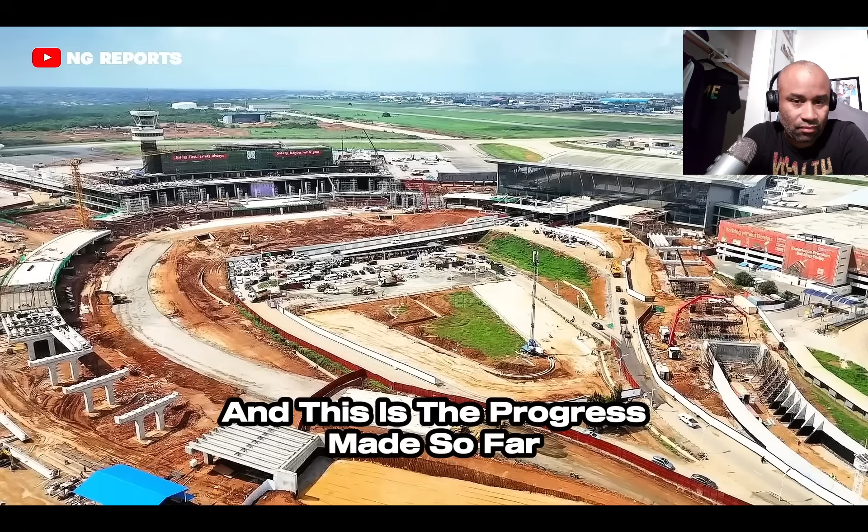Let's get into this. Murtala Muhammed International Airport, and this is the progress made so far. Just a few months ago, work began with the construction of a modern temporary

Here's a question I got. Since it's being built, how much are you guys getting? How much are people getting paid to work at this construction site? Like, is it good money? Is it consistent? Is it a union? Like, what's the work like at this construction site?

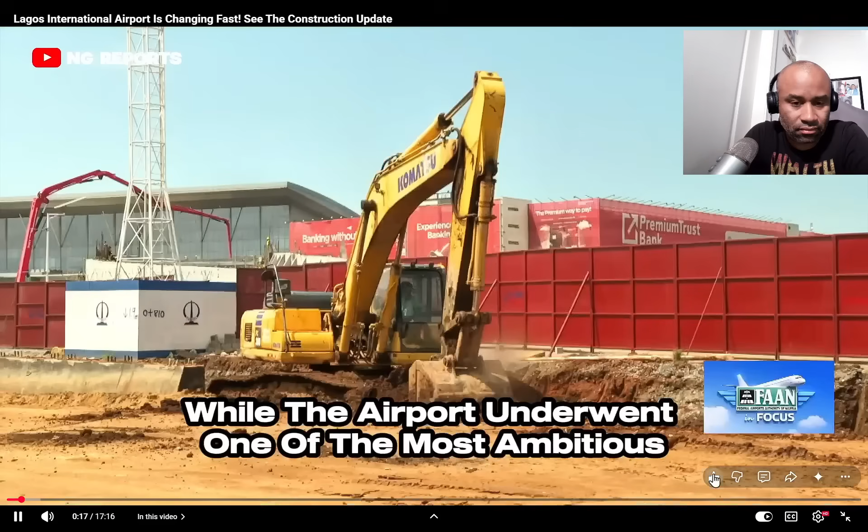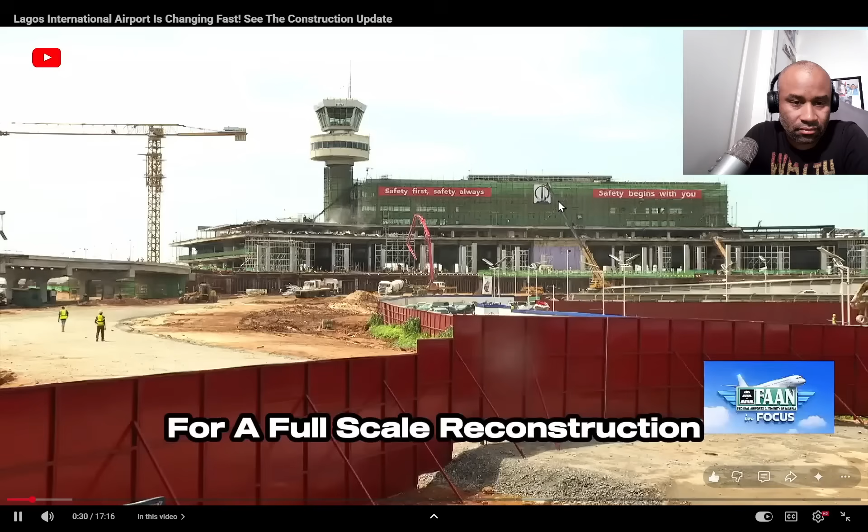international terminal to ensure passengers could continue flying while the airport underwent one of the most ambitious redevelopment projects in Nigeria's aviation history. Since then, Terminal 1 has been completely shut down and stripped back to its structural frame for a full-scale reconstruction. Now, I did a reaction a while ago where they had a temporary terminal, and that temporary terminal looked almost better than a lot of airports' regular terminals.

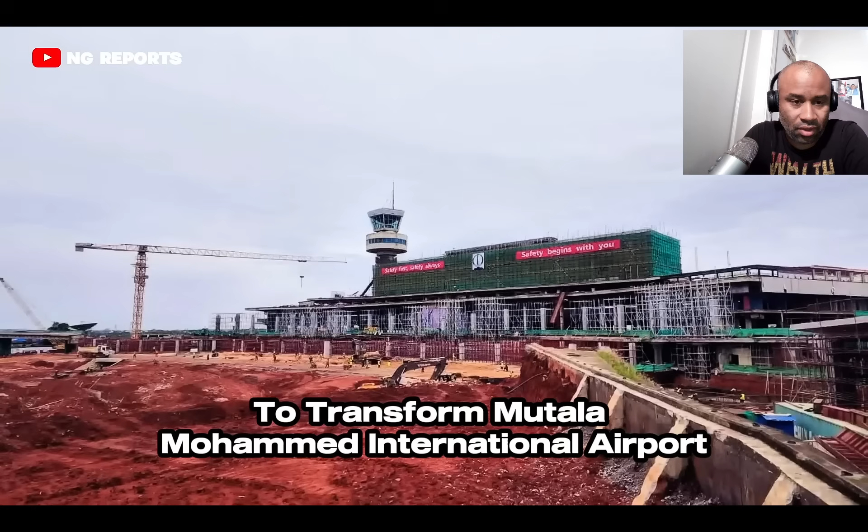Another major phase has officially commenced, the redesign and expansion of Terminal 2. These developments are not isolated projects. They form part of a comprehensive master plan to transform Murtala Muhammed International Airport into a modern, world-class aviation hub capable of serving millions of passengers more efficiently while enhancing safety, comfort, and operational capacity.

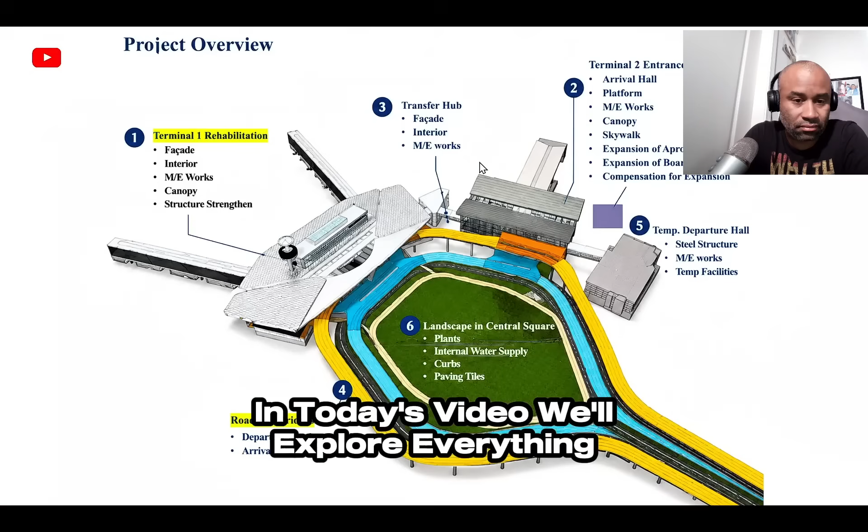In today's video, we'll explore everything you need to know about the project, from the redesign and expansion of Terminal 2 to the construction of the new airport road network, the latest update on Terminal 1, the future of the temporary terminal, and a complete overview of what passengers can expect over the coming months. I hope this thing is done when I get there, because I want to see the finished product.

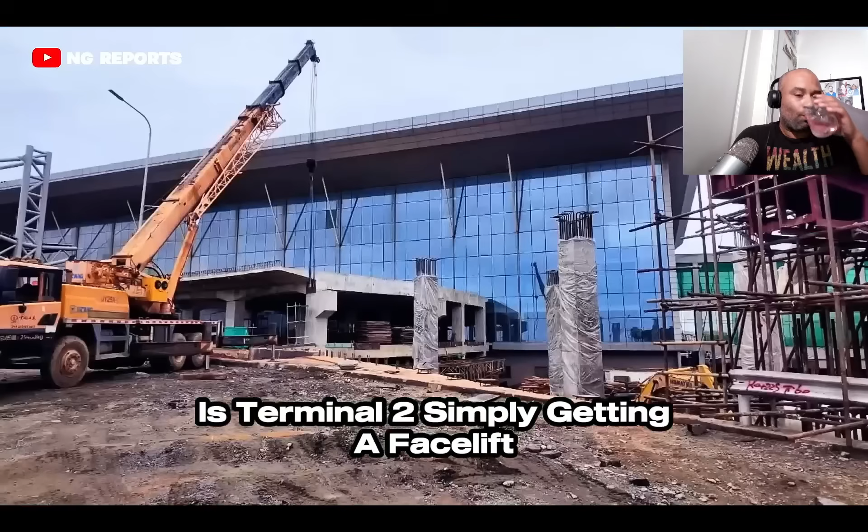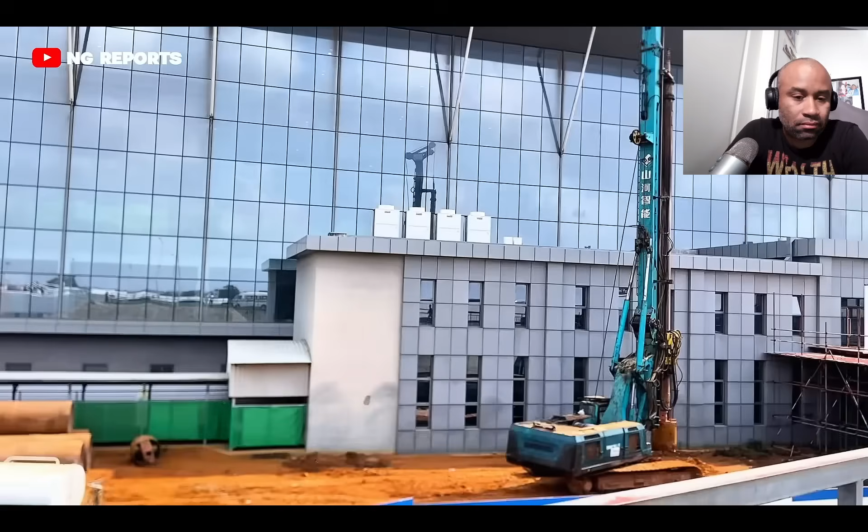Terminal 2 renovation progress. One of the questions I receive most often is, is Terminal 2 simply getting a facelift, or is it being rebuilt? The answer is that this is much more than a cosmetic upgrade. According to the Minister of Aviation and Aerospace Development, Mr. Festus Keyamo, SAN, Terminal 2 is undergoing a comprehensive redesign and expansion that will significantly improve passenger experience and airport operations.

If you walk into Terminal 2 now, which is even the new one, we are still touching the new one, spending so much money on it. If you walk into the new terminal now, what do you notice? You have to now take your bags up to departure. So when you arrive, it's not going straight to departure. And that's a design error all over the world.

There's no airport in the whole world where there's only one door. What if there's a stampede? How can you have one entrance into a big international airport? If you go to all international airports, you see more than 7 entrances. Even the small one here in Sacramento has multiple entrances. In fact, every airport has multiple entrances, and we're a small airport in Sacramento.

Different doors, different entrances. A, B, C, D, and even the old one. If you remember the old one, Terminal 1, picture it. You have different doors. You have the Qatar, exactly. The BA. You have the picture in your head. Picture this new one, only one door.

How? And then when you drive in, you have to climb up with your bags, haul them either through the lift or escalator. And God will forgive you if it's not working. You have to then physically climb the stairs with your bags. So now, with that slope of an escalator, oh, hell no. If that escalator broke down and you gotta carry that up that slope, that's brutal. And that might be fine if you have one luggage.

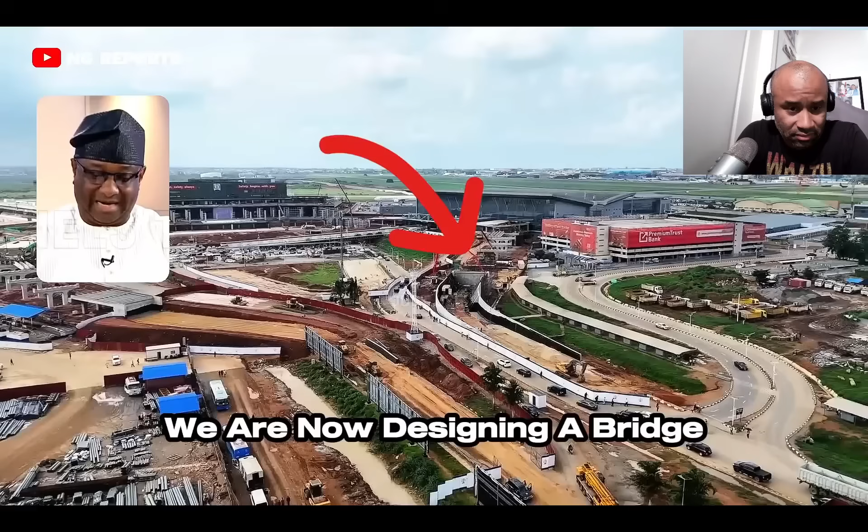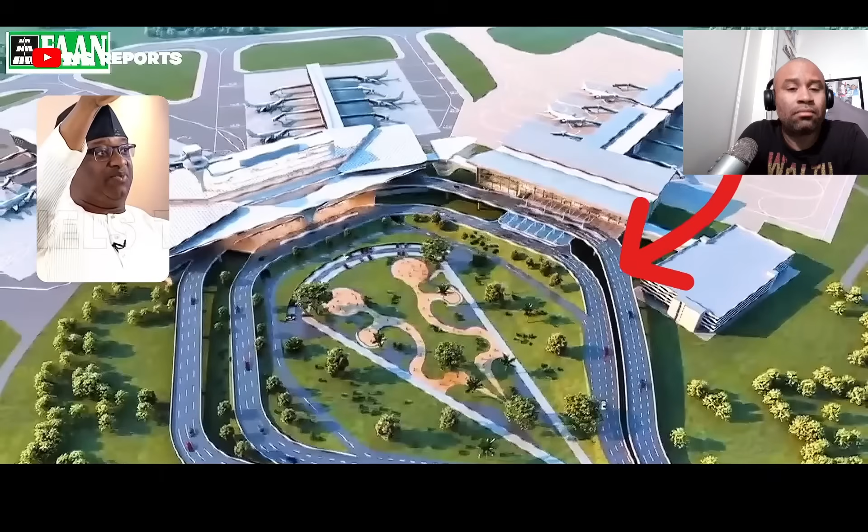We are now designing a bridge. Immediately after the army checkpoint, you are going to veer off the road and then a bridge will begin to climb that takes you straight to the second floor of that new terminal. Yeah. So that takes you straight to departure. We are putting a bridge there. It takes you to departure.

Do you understand me? And so you come down there. There'll be a drop-off. And so now you usually drop off at one car park, and then you have to haul your bags up. So now that bridge will just pass by the door, by that glass frame of that second floor. Yeah. And so you now stop there and then walk in straight into departure.

So describe to us. That bridge goes round. That bridge goes round. It's a circular bridge. It goes round again all the way.

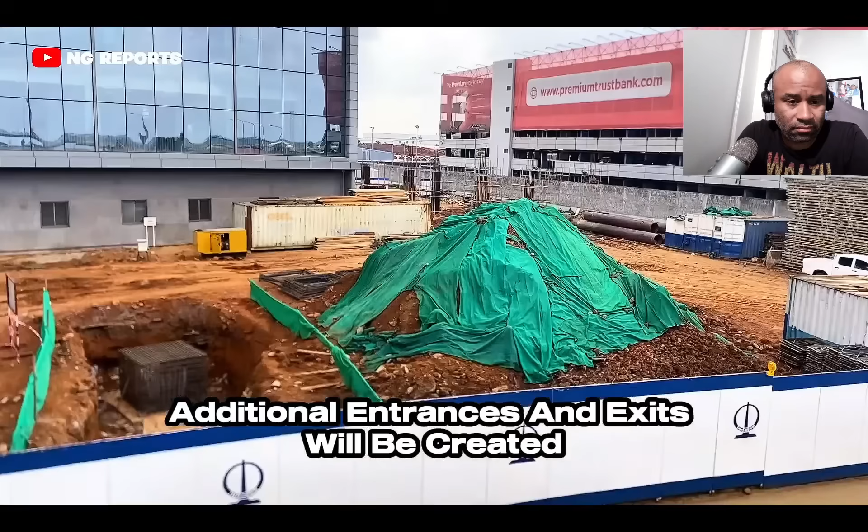One of the most important improvements is the expansion of the terminal building itself. Currently, the international terminal relies heavily on a single main entrance and exit, a layout that has long been considered inadequate for one of West Africa's busiest international airports. As part of the redesign, additional entrances and exits will be created to improve passenger movement, reduce congestion, and provide easier access during peak travel periods.

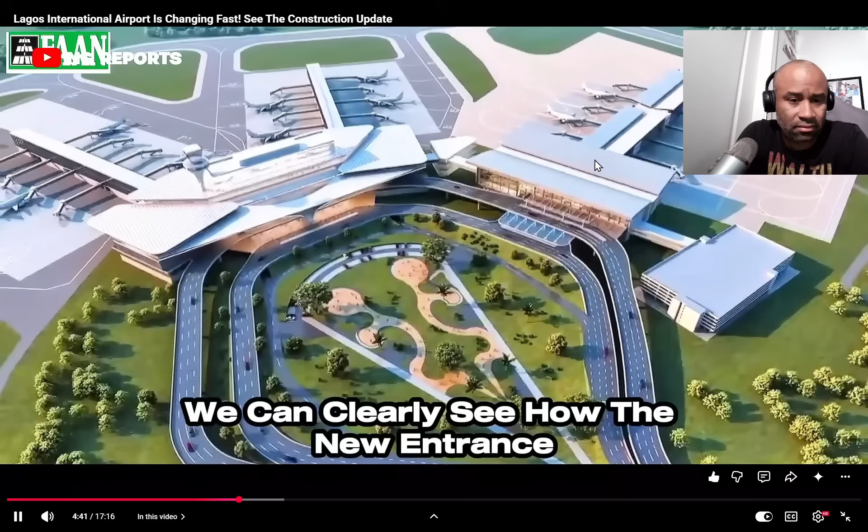Looking at the proposed architectural model, we can clearly see how the new entrance roads will function. Unlike the current layout, where nearly all departing passengers enter through a single access point before taking escalators or elevators to the departure hall, the redesigned system introduces a much more direct approach. Passengers will have easier access to the departures level, creating a smoother and more efficient airport experience.

We're going to be doing a lot of work to T2. I know a number of people have asked, look, what exactly is wrong with Terminal 2? When Terminal 2 was initially built, there was a litigation with the Federal Airports Authority of Nigeria and a concessionaire around the existing location. As such, the dimensions and the sizing of where T2 was built had to be reduced to accommodate the area that was available.

We thank the federal government because we've now taken a look at the overall master plan. We've seen that there are some hangars which are actually obstructing the area. We're able to relocate those hangars. That way we can actually extend the finger in T2. Terminal 2 will now be able to accommodate an additional 15,000 square meters. Nice. And let me tell you what that does. It's not just about increase in space.

It's really the fact that in today's environment, we're actually able to only process one wide body aircraft at a time. So for those of you who fly the likes of British Airways, Lufthansa, and KLM, you realize that you're landing in Terminal 2 today, but we're still moving you over, or you're checking in from Terminal 2, but we're still asking you to go through the finger in T1.

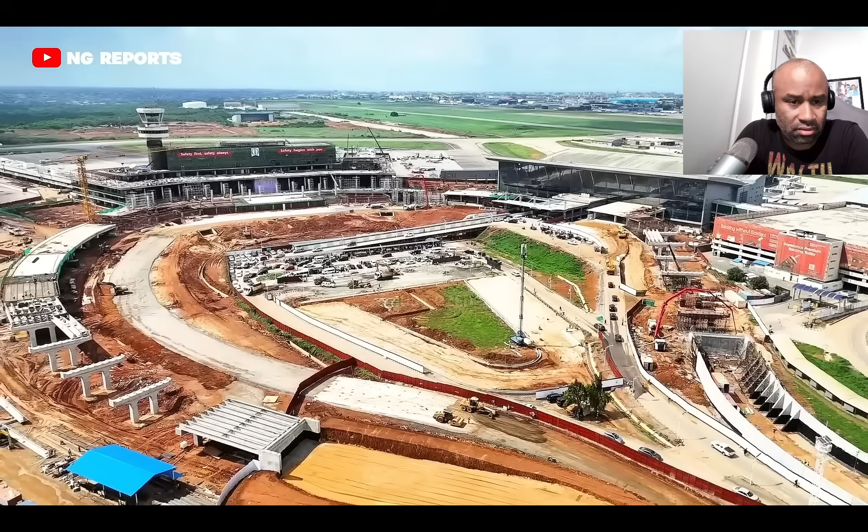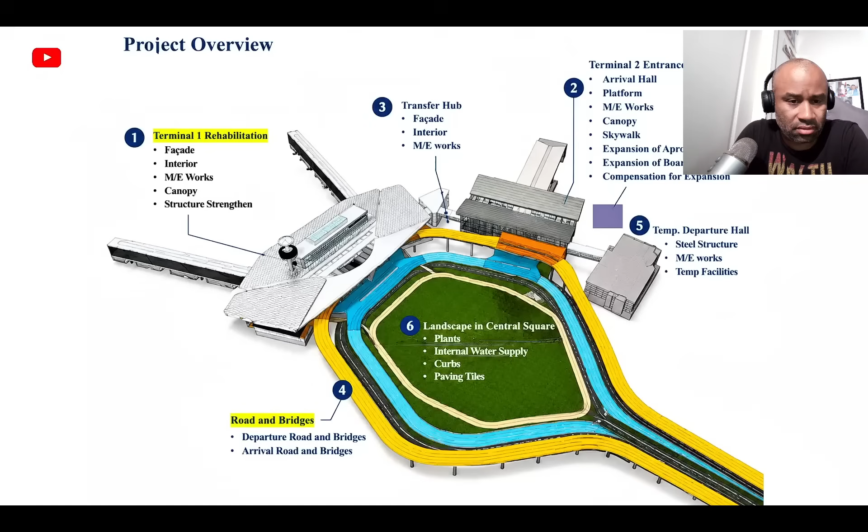Complete airport project overview. The redevelopment of Murtala Muhammed International Airport goes far beyond upgrading two terminals. It is a complete transformation of the airport complex. Let's look at the 6 major components of the project. Terminal 1 Rehabilitation. Terminal 1 is undergoing a complete reconstruction.

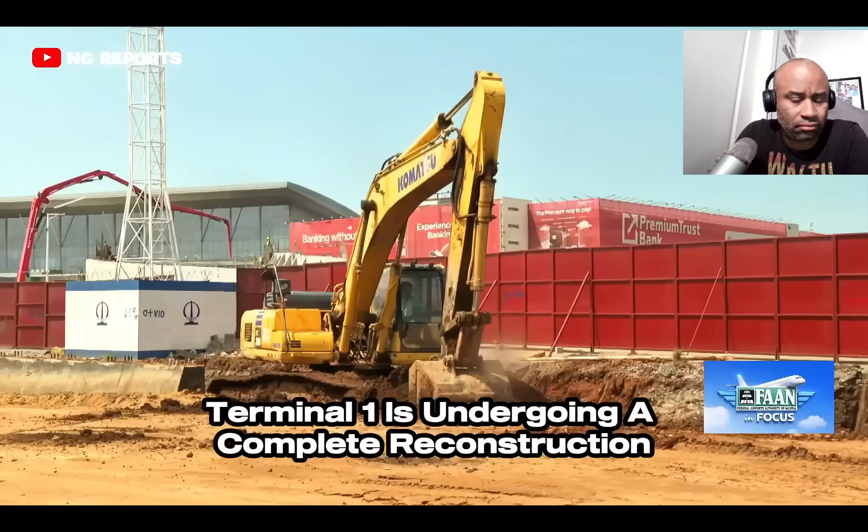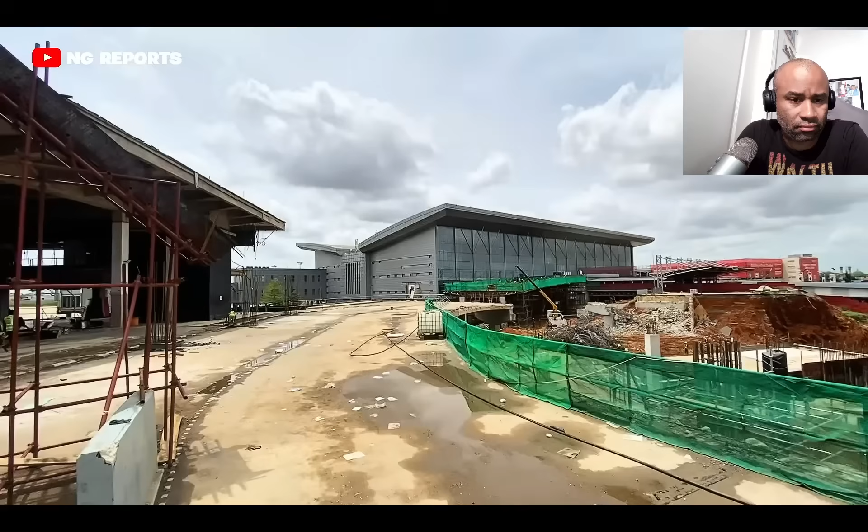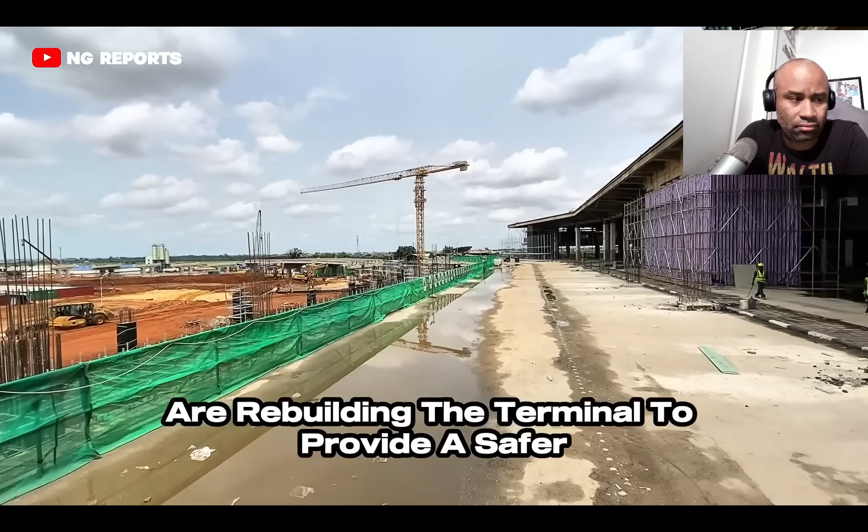The rehabilitation includes a brand new exterior facade, a complete interior renovation, replacement of mechanical and electrical systems, new entrance canopies, and structural strengthening to modern engineering standards. Rather than carrying out minor repairs, engineers are rebuilding the terminal to provide a safer, more efficient, and modern passenger experience. Okay.

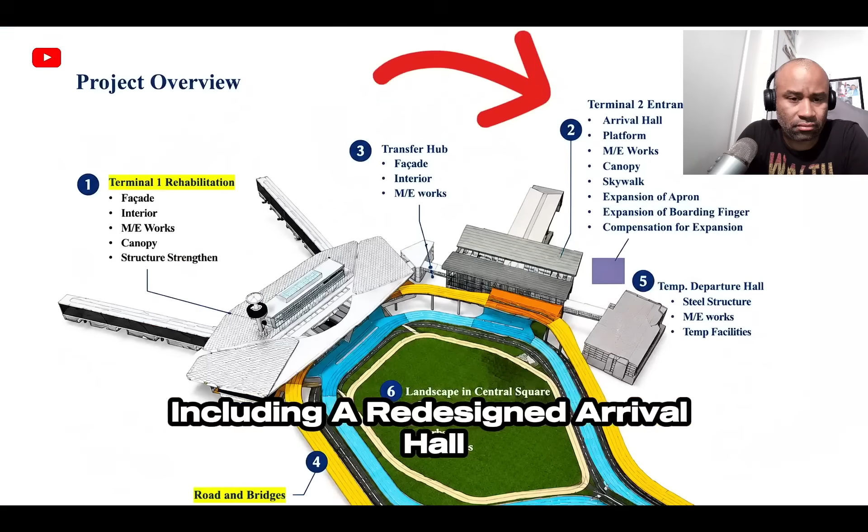Terminal 2 Expansion. Terminal 2 will receive major upgrades including a redesigned arrival hall, improved passenger platforms, new mechanical and electrical infrastructure, a modern entrance canopy, construction of a skywalk, expansion of the aircraft apron, expansion of boarding bridge areas, and property acquisition where necessary to support future growth. These improvements will increase passenger capacity while allowing the airport to handle larger international aircraft more efficiently.

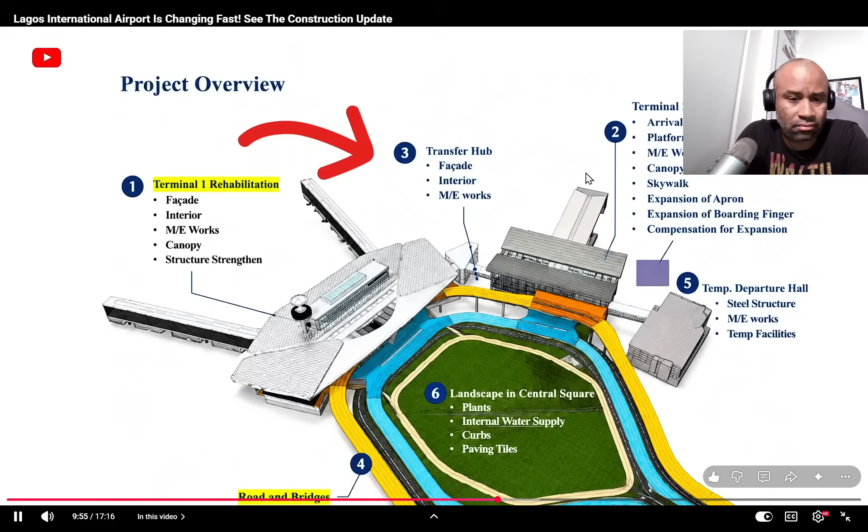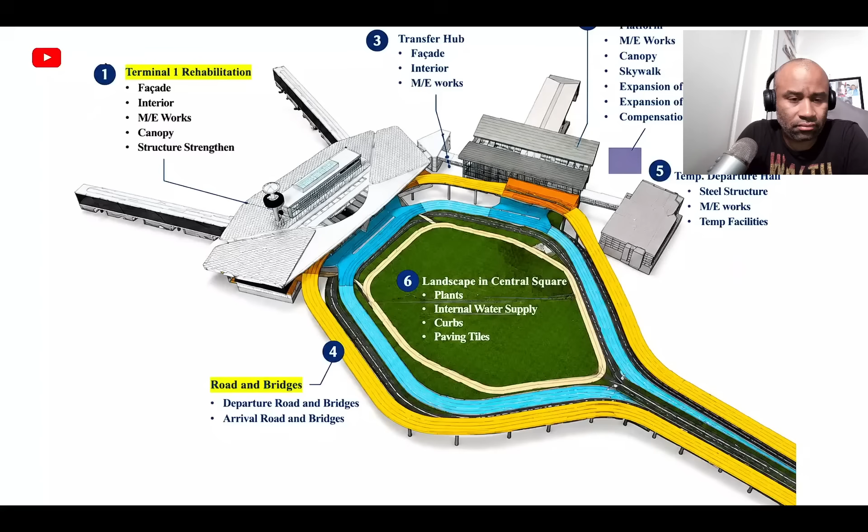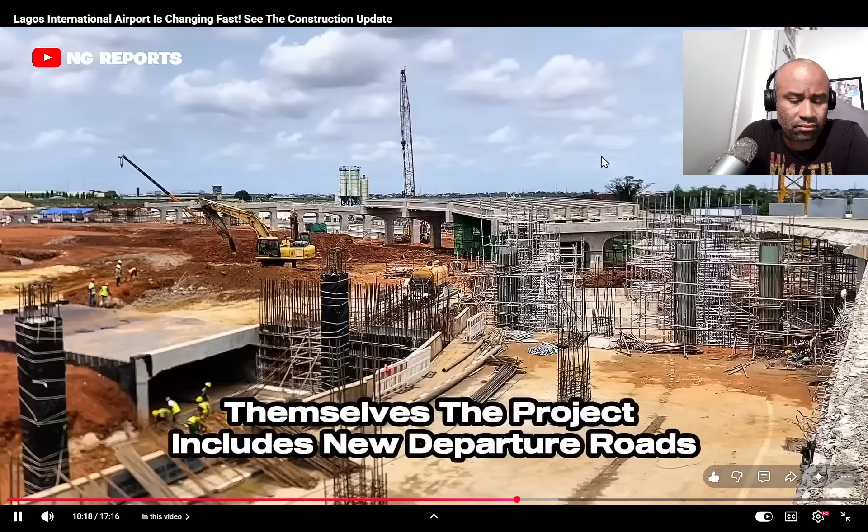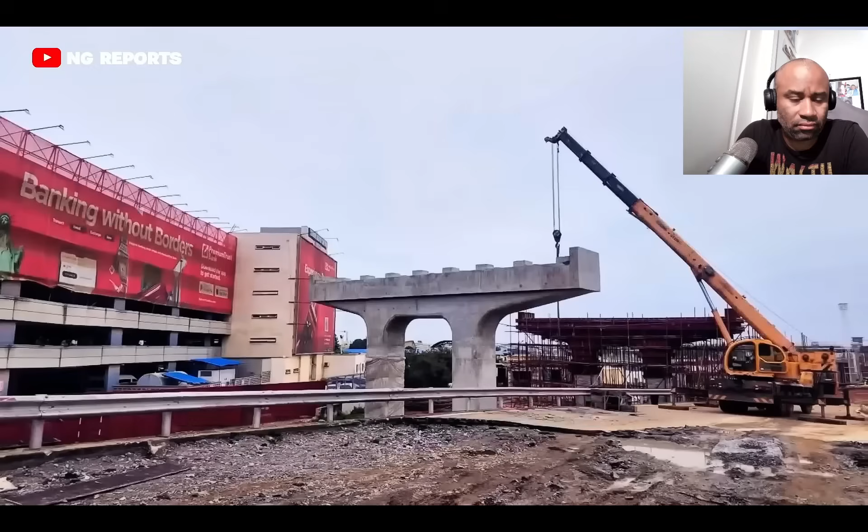A new transfer hub. The hub will feature a modern architectural design, upgraded passenger spaces, and advanced mechanical and electrical systems. Roads and bridges. Very important. Surface transportation is receiving just as much attention as the terminals themselves. The project includes new departure roads, new arrival roads, additional bridges, and improved internal road connections. These upgrades are designed to reduce congestion while improving traffic flow throughout the airport.

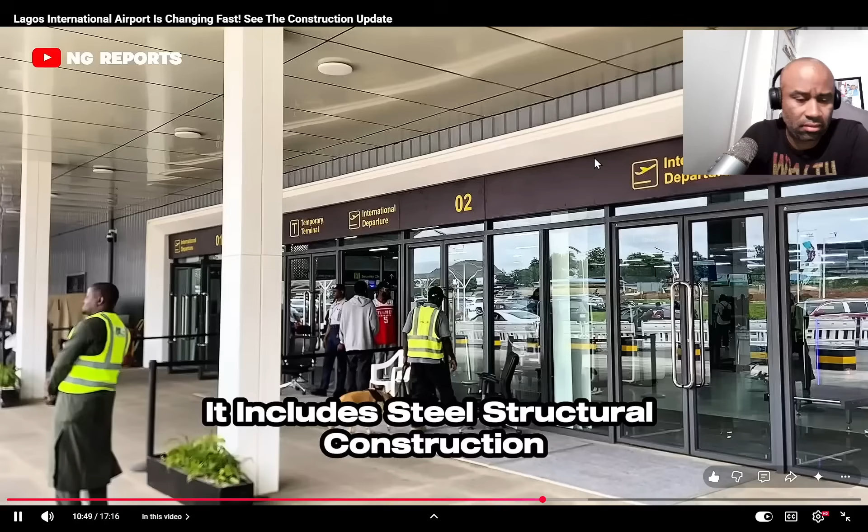Temporary departure terminal. Before Terminal 1 closed, the airport constructed a modern temporary departure terminal. Although designed as a temporary facility, it includes steel structures. See, this is kind of the interior I'm used to right here. But obviously more doors, so this is kind of what I'm used to. And I wonder why, they explained it already in the video, but yeah, it's strange that the original one wasn't like this before.

Structural construction, modern mechanical and electrical systems, passenger waiting areas, check-in facilities, security screening, and boarding gates. And will there be a business lounge? Gotta have a business lounge. This temporary terminal has allowed international operations to continue without major disruption while reconstruction work progresses.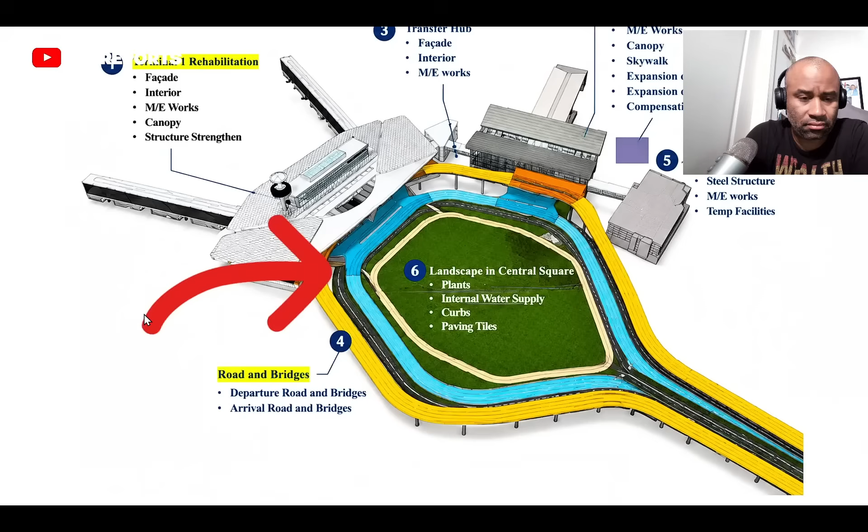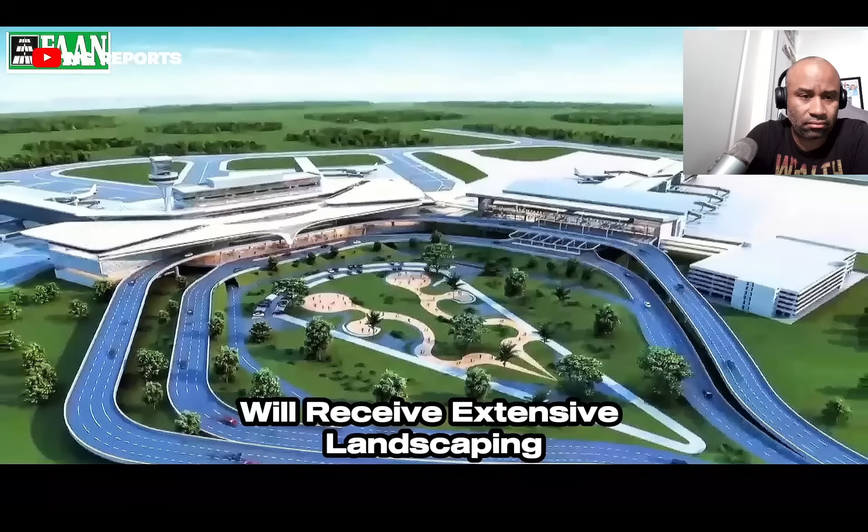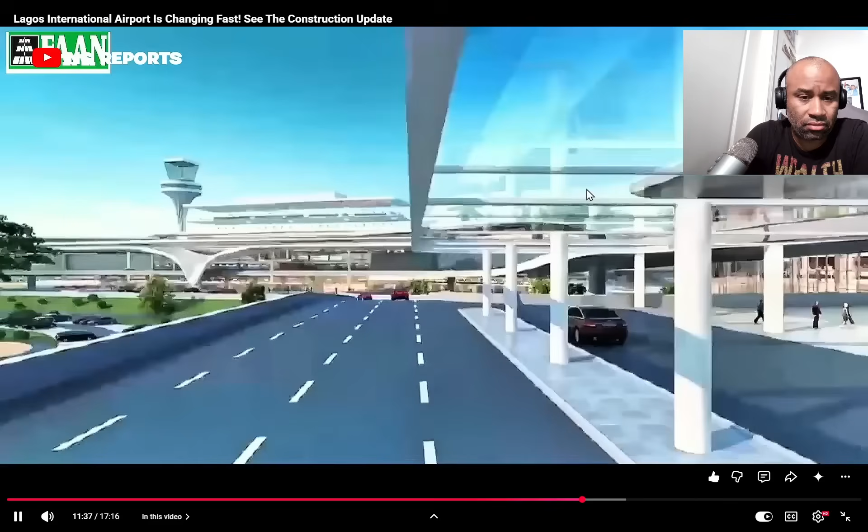Central Square landscaping. The final component focuses on creating a welcoming first impression. The central square in front of the airport will receive extensive landscaping, including trees and ornamental plants, internal water supply systems, new curbs, modern paving, and improved pedestrian walkways. And also, where are the pickups for like taxi, Uber, and stuff like that? These improvements will enhance both the beauty and functionality of Nigeria's busiest international airport.

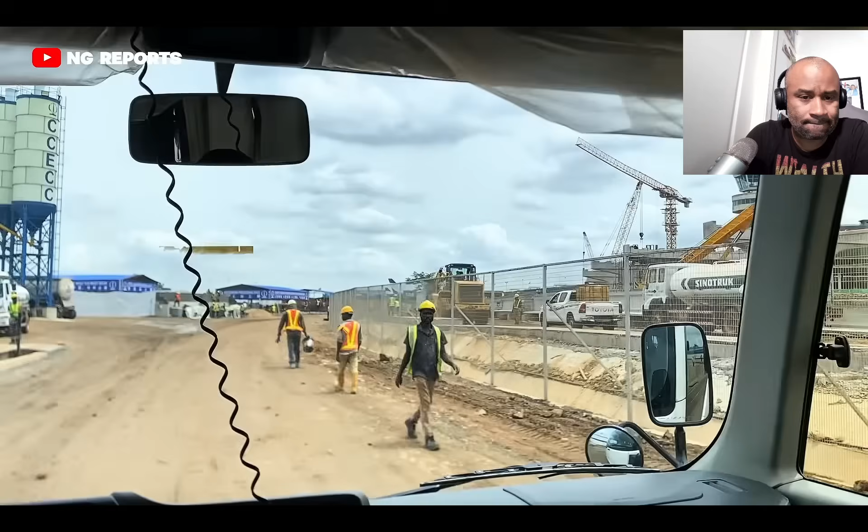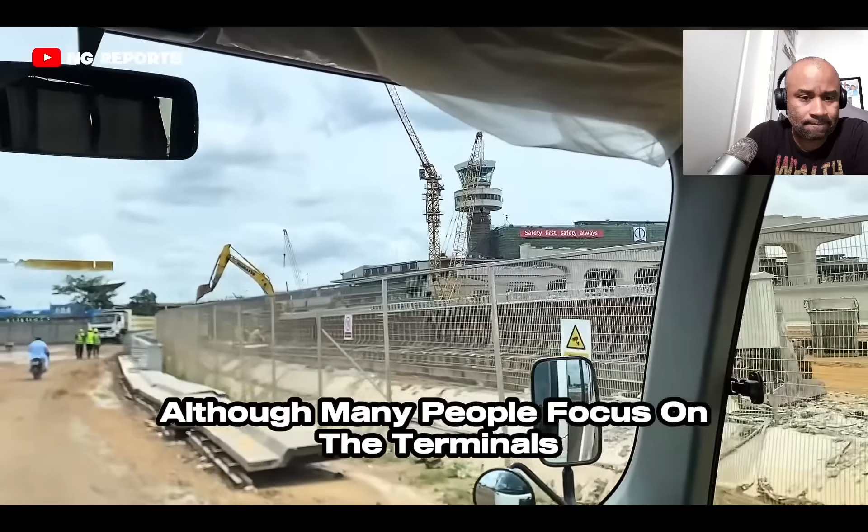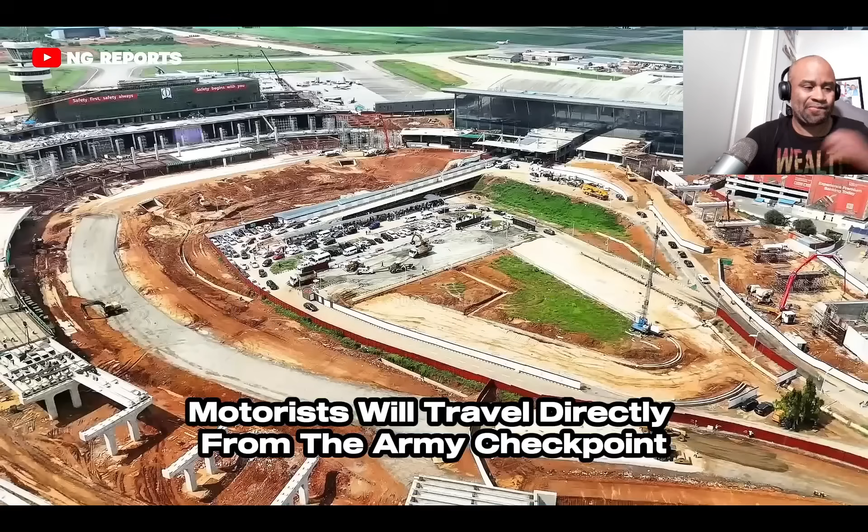New airport road network progress. One of the most impressive aspects of the redevelopment is the construction of an entirely new airport road network. Although many people focus on the terminals, the road system will fundamentally change how passengers move through the airport. Once completed, motorists will travel directly from the Army checkpoint into the airport, with easier access to both Terminal 1 and Terminal 2. Nice. Passengers will also be able to reach either the upper departure level or the lower arrival

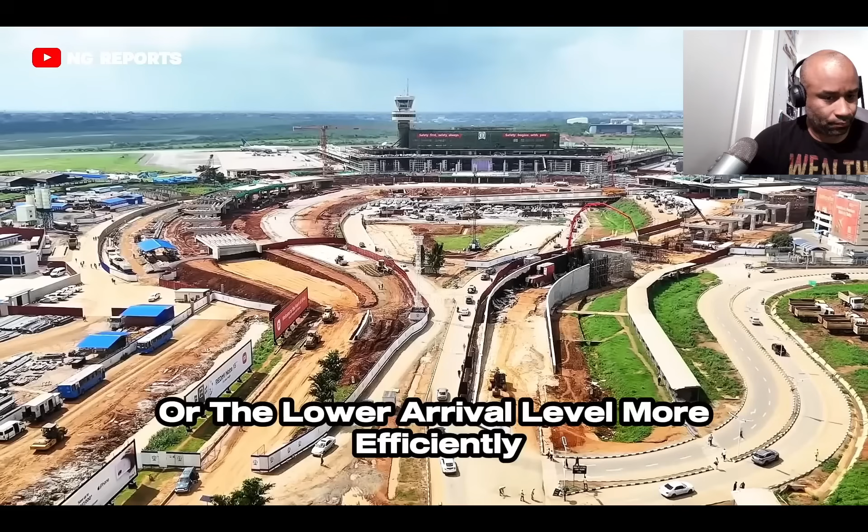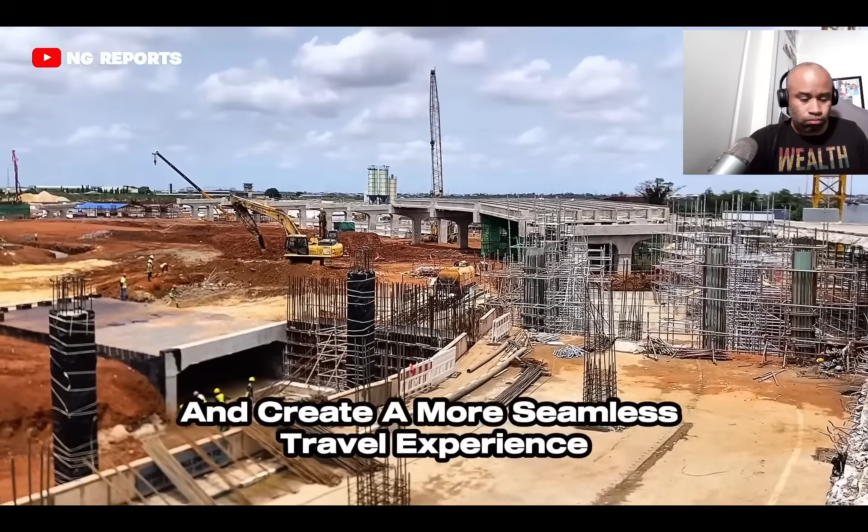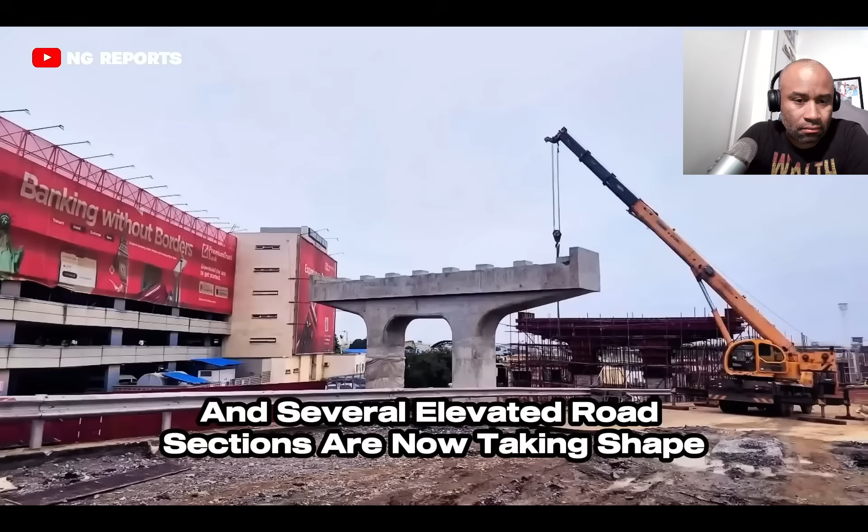level more efficiently. The redesigned layout is expected to improve traffic circulation, reduce congestion, and create a more seamless travel experience. Nice. Construction is progressing rapidly. Across the site, reinforced concrete pillars have already been completed, and several elevated road sections are now taking shape. With each passing week, the overall design becomes more visible, offering a glimpse of what the finished airport will look

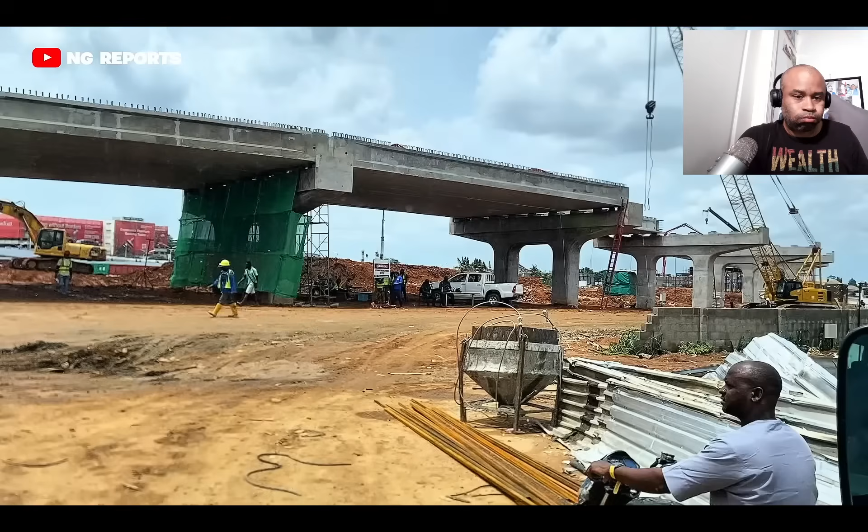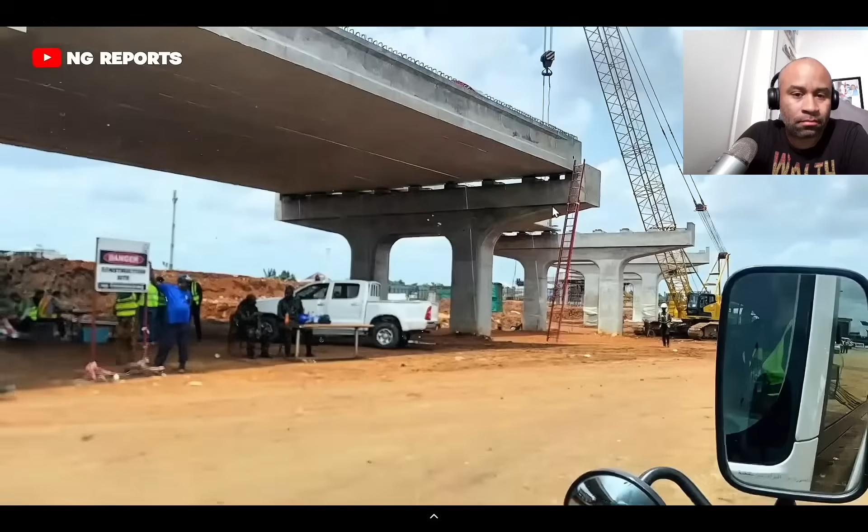like. Beyond improving traffic flow, the new roads will also enhance the airport's appearance, creating a more modern gateway into Lagos. Once you guys get this together, this will be a great first impression of Lagos when you come in. Be a great first impression of Nigeria. Because it looks like it's going to be beautiful when it's done.

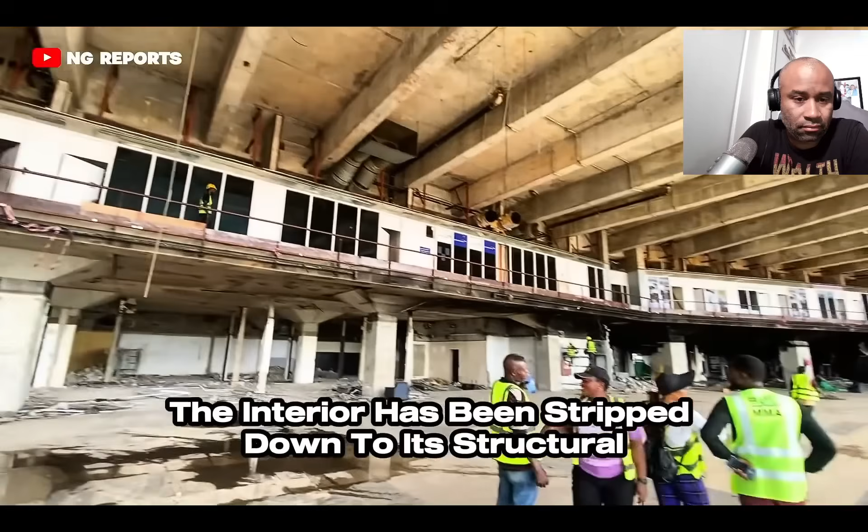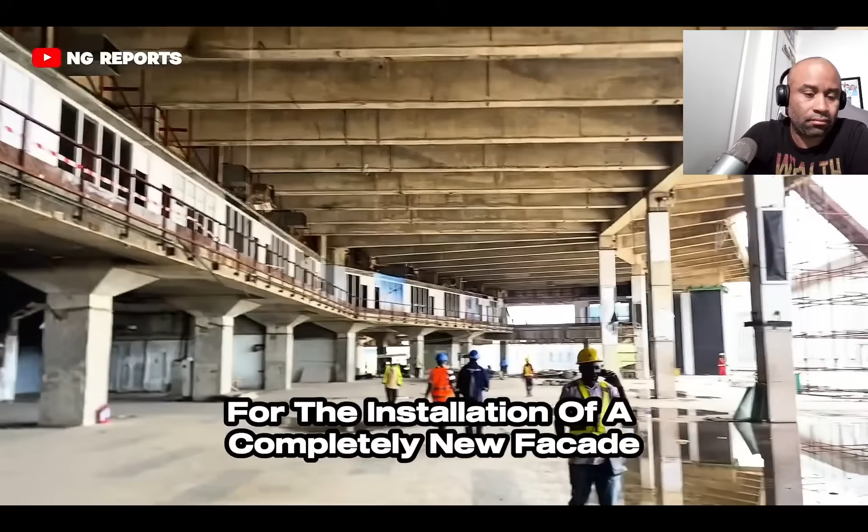Terminal 1 construction update. Now let's move to Terminal 1. As many viewers already know, the terminal has been completely closed for reconstruction. The interior has been stripped down to its structural framework, allowing engineers to begin strengthening the building before installing new systems and finishes. Work is currently focused on structural reinforcement while preparations continue for the installation of a completely new facade and modern airport infrastructure.

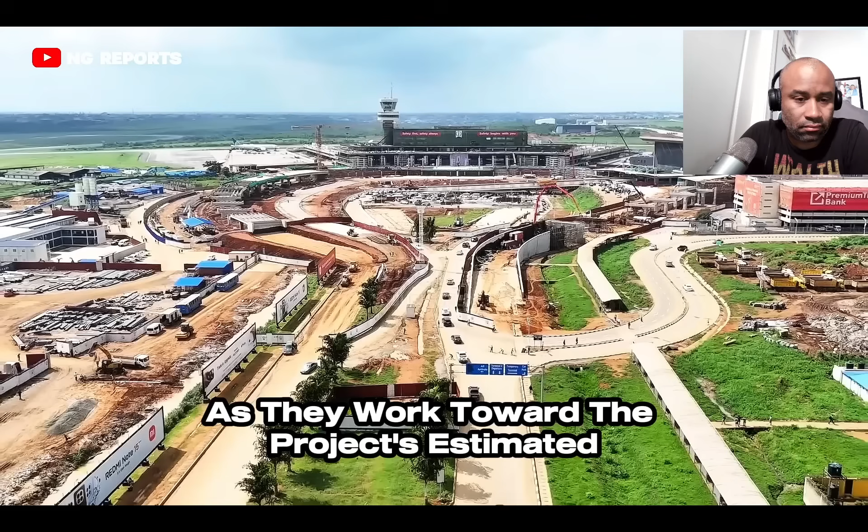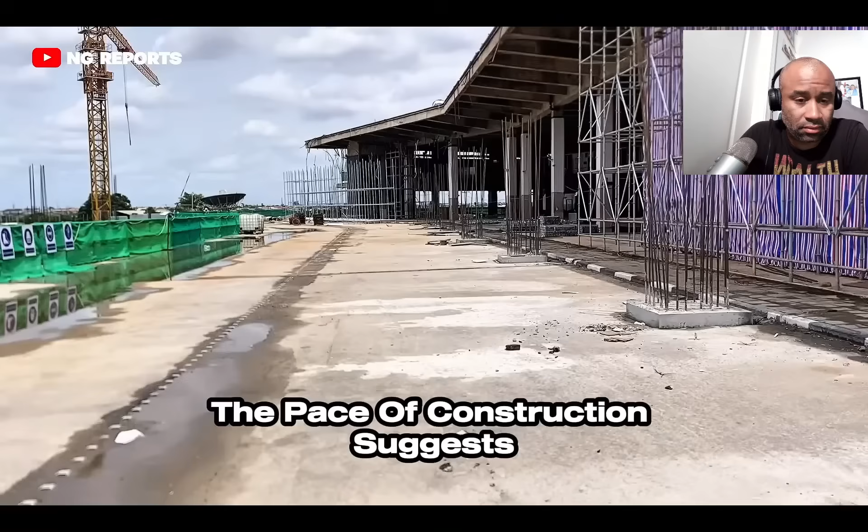From the latest construction footage, progress is clearly visible. Construction teams remain on site every day as they work toward the project's estimated 22-month completion target. 22 months. It's pretty fast. Although there is still a considerable amount of work ahead, the pace of construction suggests that the redevelopment is moving steadily forward.

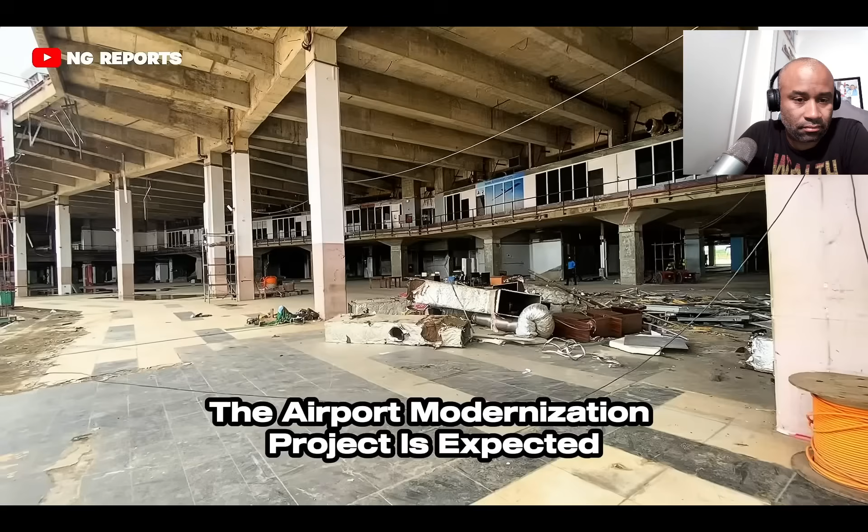How long will construction take? The airport modernization project is expected to take approximately 22 months. Like any major infrastructure project, however, timelines can be affected by weather conditions, equipment deliveries, technical adjustments, and other unforeseen factors. Nevertheless, the visible progress on site suggests that work is advancing at a steady pace.

How much will the entire project cost? The complete modernization of Murtala Muhammed International Airport is estimated to cost 712 billion naira. This investment covers the rehabilitation of Terminal 1, the expansion of Terminal 2, the new transfer hub, temporary terminal facilities, expanded aprons, new roads and bridges, upgraded passenger infrastructure, and extensive landscaping. It represents one of the largest airport redevelopment projects currently underway in Nigeria.

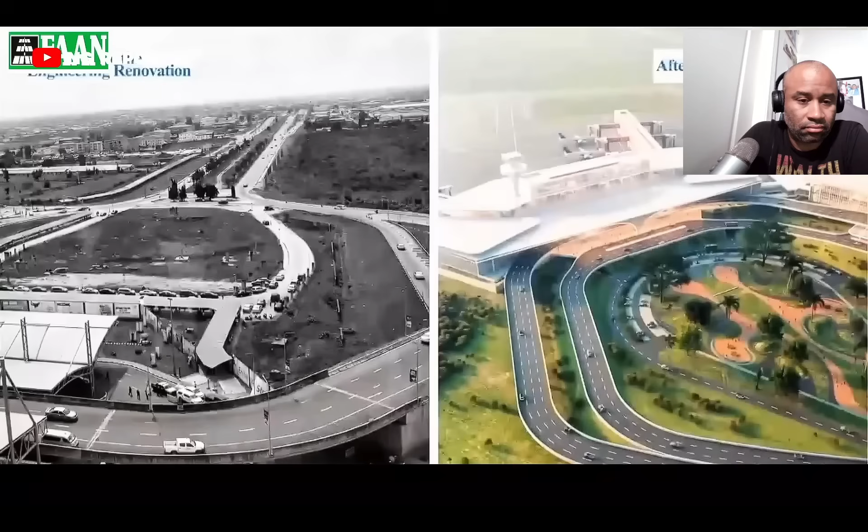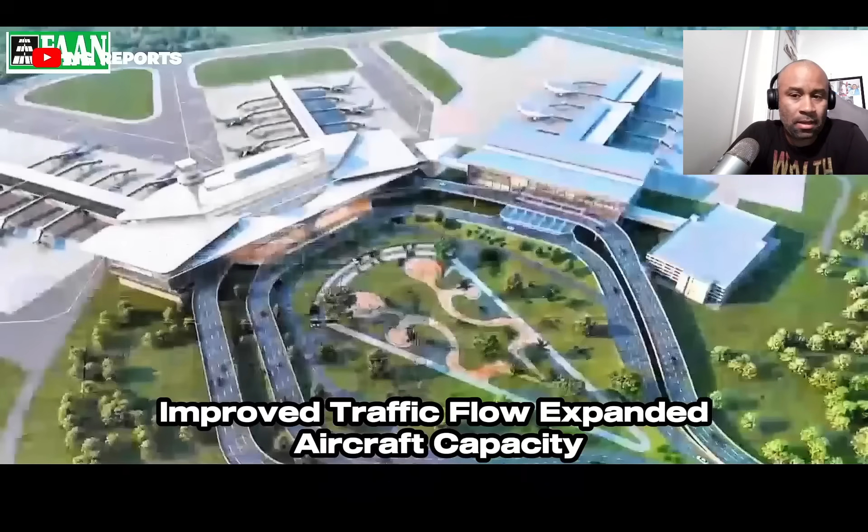When completed, this project will completely transform Murtala Muhammed International Airport. Passengers can expect modern terminals, improved traffic flow, expanded aircraft capacity, better connectivity, upgraded passenger facilities, and a much more efficient travel experience. More importantly, the redevelopment reflects Lagos's ambition to strengthen its position as one of Africa's leading aviation hubs and prepare for the growing demand for international travel in the decades ahead.

This is more than just an airport renovation. Especially with so many Black Americans coming back to the continent, you really want to get this going. Because I think we're going to be traveling a lot, so we may be using this airport a lot personally. It's a long-term investment in Nigeria's future.